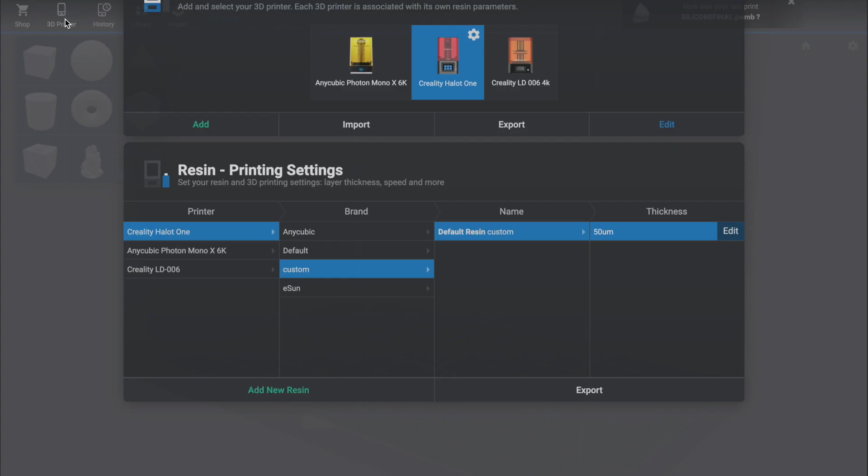In the description to this video, there's a link, and that link will take you to a folder which has this little document in here, so you need to right-click on that and go download. That will then download the file to your computer. What you do next is you click on this 3D printer icon here, and you go import, and then import 3D printer profile from Lychee Slicer exported file.

So we select the file, and then you've just got to find where that file is in your downloads. And then you go open, and then you might have to restart Lychee again, but then that should bring up all of the 3D printers we have with all of the associated resins that we have in school as well. Now this is really useful, and it's very intuitive to use because you can literally decide which printer you need to use for which kind of part.

So the Creality one is quite small. It's good for small parts, and if you're just doing little test prints out of resin and stuff, then this one's great. The Photon Mono X 6K is the next size up. That one's pretty big, and then the biggest one is the 006.

Personally, I find that the Anycubic is a very good one for using with larger prints and things that need to be made from stronger resins or more specialist resins. And then the little one here is great for doing small, very detailed items.

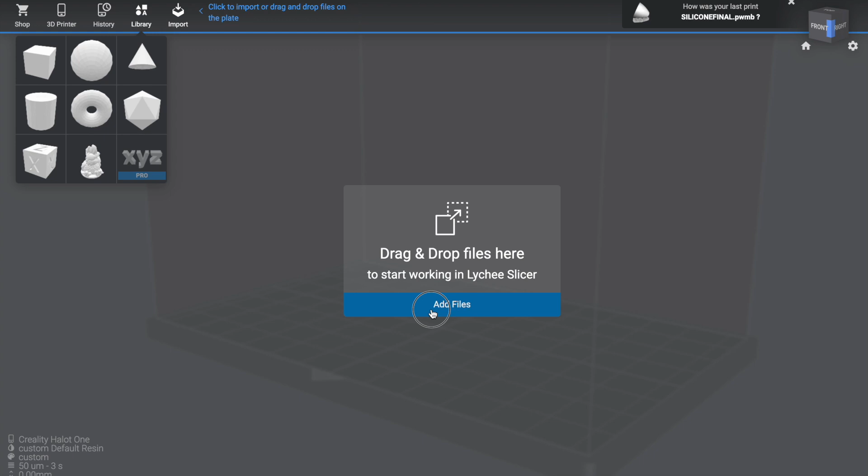So once you've got your printer set up, the next thing to do is to import a file. So I'm going to add a file. Now you'll notice actually on my 3D printer profile, I've got the Halot One selected, so the little one selected at the moment. So what I'm going to do is add a file next. And here's a sample part from a student's example CAD model. So I'm going to bring that in.

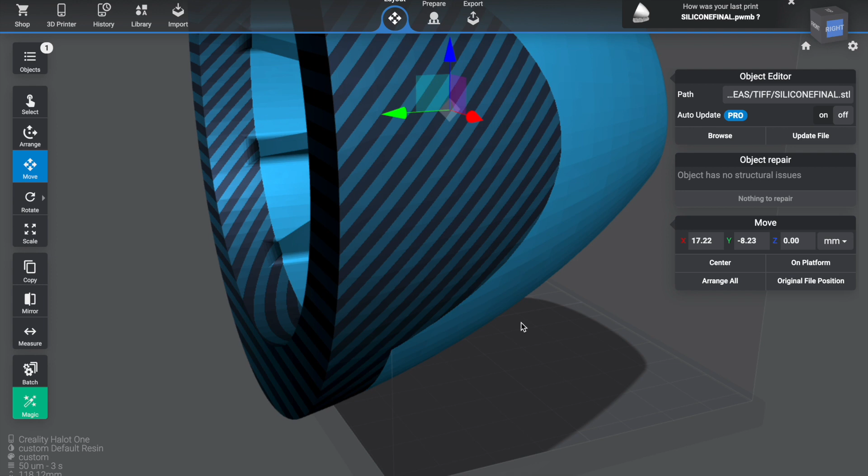Okay, so as you can see, this one is pretty large. In fact, it's too large for the print bed. And we can see that because we've got the areas in red here. Now, this is a good example. If you're printing something this big and you're sure that the dimensions are correct, then we'd have to switch printers. So this is where I'd go to printer, and I'd probably go to the Mono X 6K.

Now, this is where I'd also choose which resin I want to use as well. So with the Anycubic printer, it's good to use the Anycubic resins. And the standard ones that we use are just these two here, the Rapid Basic, standard black or white. White's good because it's easier to paint afterwards. So I'm just going to select white. Yep, and then that's all good.

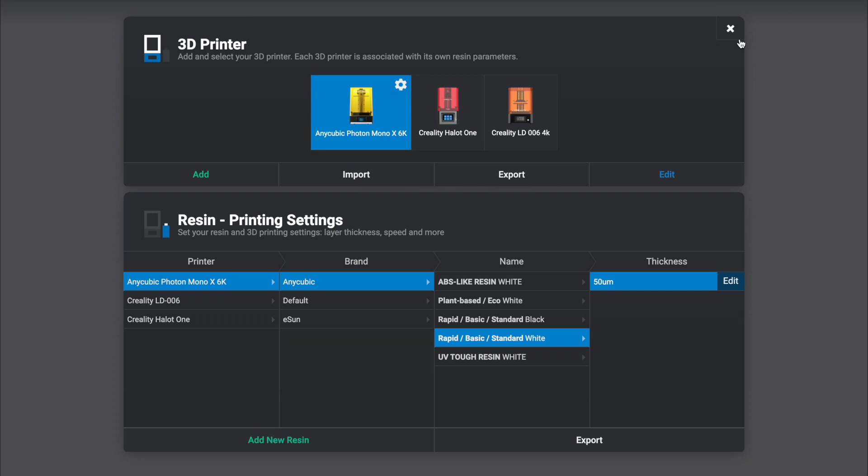And what's so good about this is basically this software does all the work for you because you select the printer, you select the resin, and then we get it ready to go after that. So the next thing is you can see here that the print bed, or the resin vat, that fits nicely in there. But with resin printing, it's a bit more technical in terms of how the part is positioned for printing and how supports are positioned and all that kind of thing.

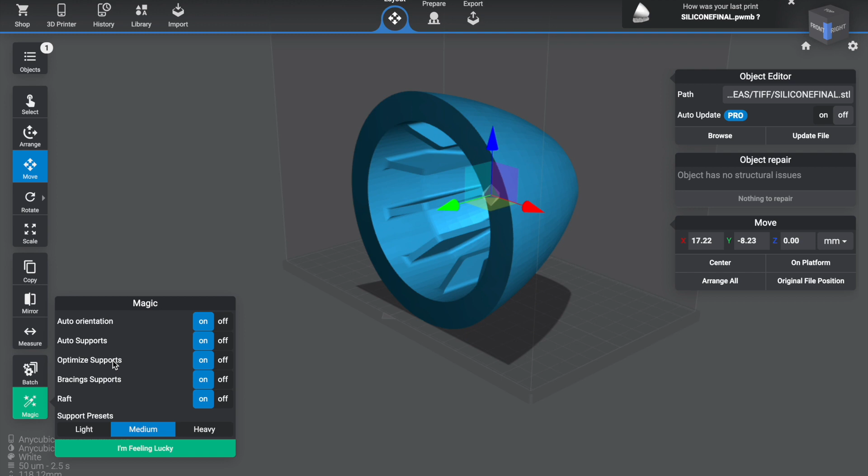Now, again, luckily, Lychee will do all this for us. This little magic button here, you click on that, we make sure all these are turned on. What this does is it works out the best orientation for the model, works out the number of supports and optimizes them, and also sorts out the raft that will be needed. You can leave it on medium, and then you just go, literally, I'm feeling lucky.

And then what will happen here is the software will figure out the best way to print this and the best positioning, and then it'll work out how many supports are needed. And it will even tell you the volume of resin that it's going to use as well.

Okay, so this is nearly done. And it's just adding the supports, and then the raft is the sort of the bed that's built on the build platform. That's kind of what holds the print onto the build platform. So you can see it's a lot more mathematical the way it does this than Cura. Cura is a much more straightforward process in terms of the computer power that's needed.

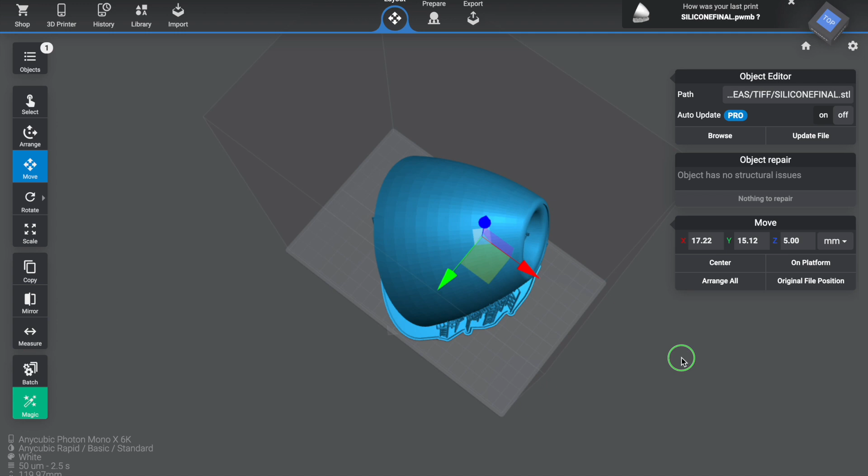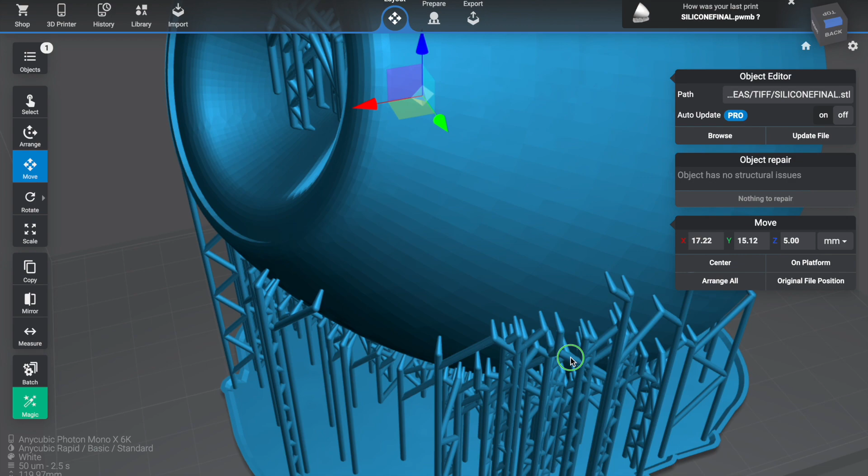Okay, now you can actually see the difference in the style of the support structure. The support structures are really very different indeed. This is more what's called like a tree of supports. And this one looks okay, I think. To be honest, with resin printing, most of the time it's just trial and error. You print it and you hope for the best.

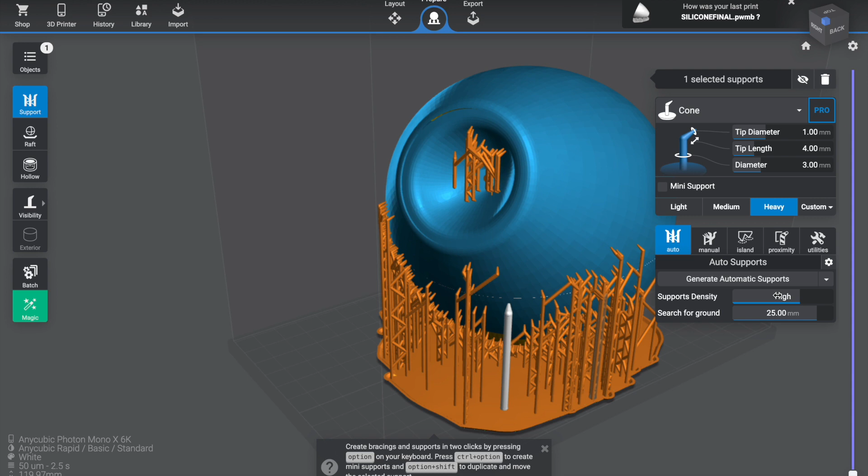To be honest, often with supports, it's better to have more than not enough, because otherwise, when there's not enough, you get areas that warp a little bit and they don't come out properly. So if I went to prepare, you can even add on custom support. So if you wanted to add some more manually, you can literally just click your mouse and it will add them on. But if you want to go auto, you can slide up the density to high, and we can just go generate supports again.

I've found from experience with resin printers that, when there's not enough support, that's when you get problems like the print will warp and it will bend and it won't quite come out the shape that you want it to be. The whole point of resin printing is you get an accuracy that far exceeds any FDM printing process. With this Anycubic printer, it has a 6K screen, so the resolution that does the printing is actually 6K. So it's got an incredibly high resolution. That alone is something that's worth bearing in mind.

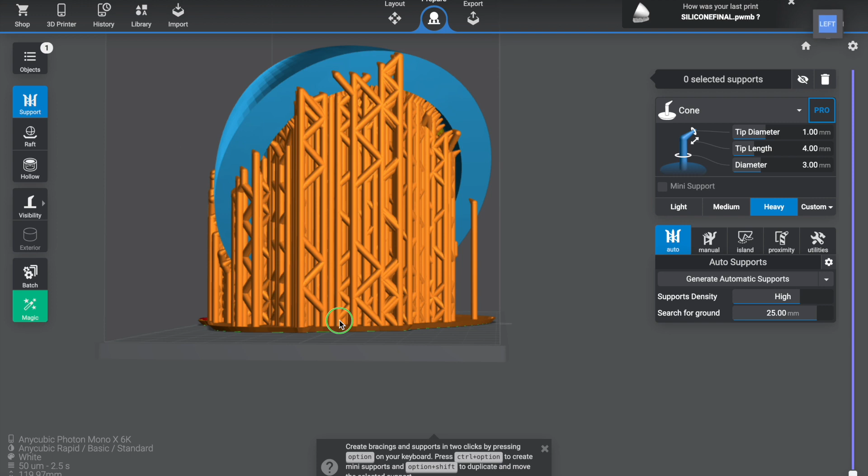So you want to get this right first time, really. So we try to minimize the amount of errors that we have with these. And also, it's just because it takes a little bit longer and the resins are a bit more expensive. So we'd only really use this when you know that the final print is good to go. All right, so that's saying it's done all the braces now. There we go. That's a lot of support structure there now, but that's fine. That's what we want.

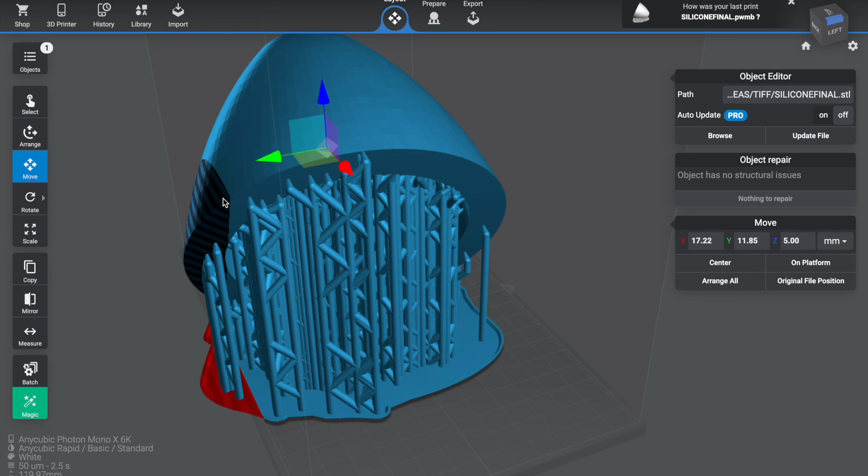And we're going to have to move the whole thing across as well, just so it can fit onto the build plate. Ooh, that's not quite fitting there. So we might need to do a rotate. So let's see if we can just get this to fit. If we go arrange, and actually we'll go move, and then we'll just move that across there. And we can just get it in there.

There we go. Okay. Then once you've done that and you've got the supports on, you can click on file and go export. You leave everything as it is. You just check that the printer is correct and you've got the right resin. And you just go export slices. And what it will do now is it will slice the model.

There is an advert that comes up, which is kind of annoying, but that's the price we pay for free software.

Once you've done the slicing process, what's quite helpful is to get this slider here, and you can slide through the model. You can just see how it's going to print. It's going to obviously start at the bottom. It'll do the raft first, which is that base there. It'll print up and up and up, and you can see how the LCD screen will expose each layer to the UV resin. You can see gradually it starts then building the part there.

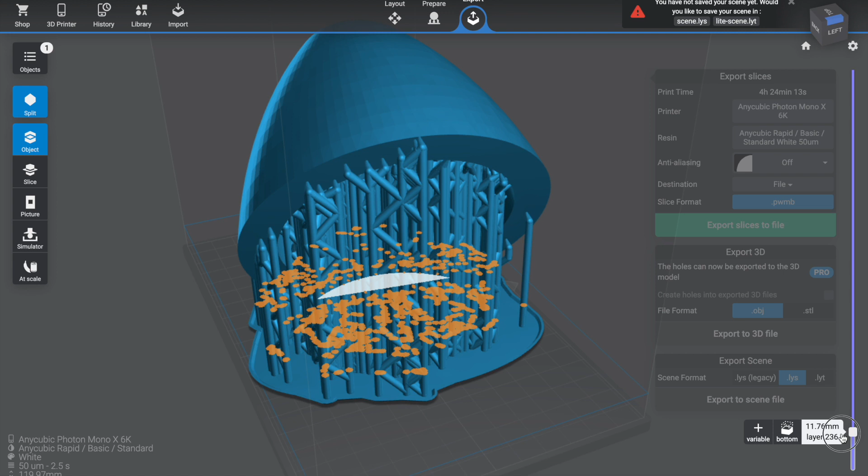So this is a good way of also checking if there's any major overhangs or any part of the design that's not going to be supported. You can just go slice by slice all the way through the model. You can see what's support and what's actual product there. And then it will show the final layer at the top. So once you've done that and you're all happy, you can just export it and send it off to the 3D printer.